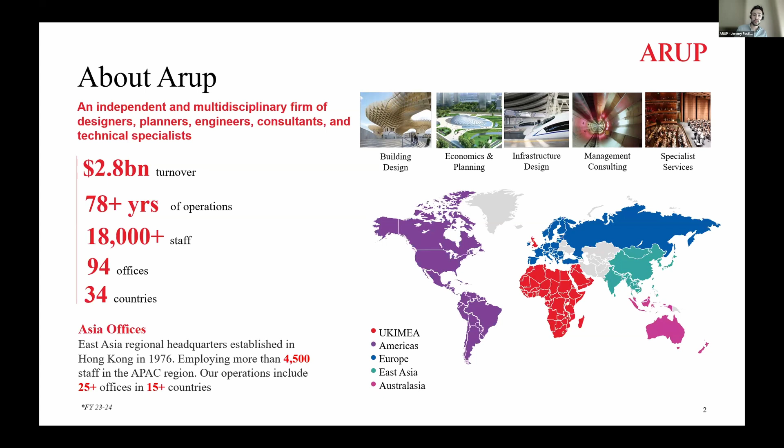Now, we have been involved in a lot of alternative fuel projects around the region, and we've been very active specifically across East Asia and Southeast Asia as well. So, for instance, in Singapore, we've been involved with techno-economic studies or supply chain studies for the Singapore and UK government. And we just recently completed a project for a private investor in Singapore that was looking at decarbonizing CCGT turbines with alternative fuels like green hydrogen, but also blue ammonia, green ammonia, and other combinations of green fuels.

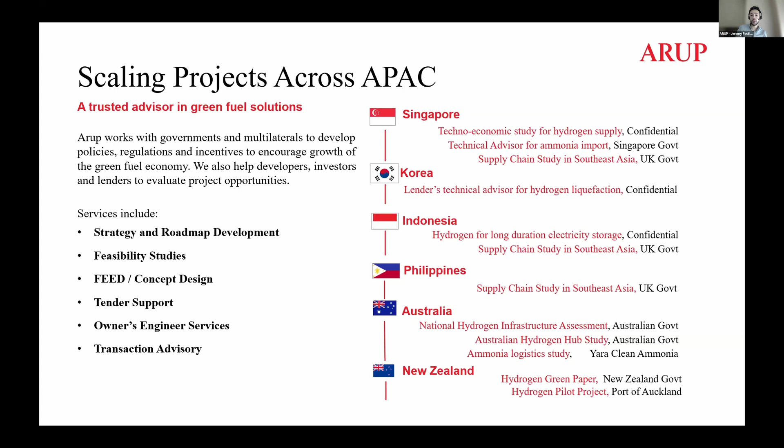But we also covered other parts of East Asia, such as Korea. We've also done Japan, which is not shown on this slide here. We've also covered countries like the Philippines and Australia as well, so beyond Asia as well. In Hong Kong, we've also been very active in hydrogen projects specifically. And this started really with the 2023 study that we did for the EMSD, in which they had started the feasibility of launching a hydrogen bus for Hong Kong. Now that is actually rolling in Kowloon, but we did the original drafting of the code of practice for EMSD.

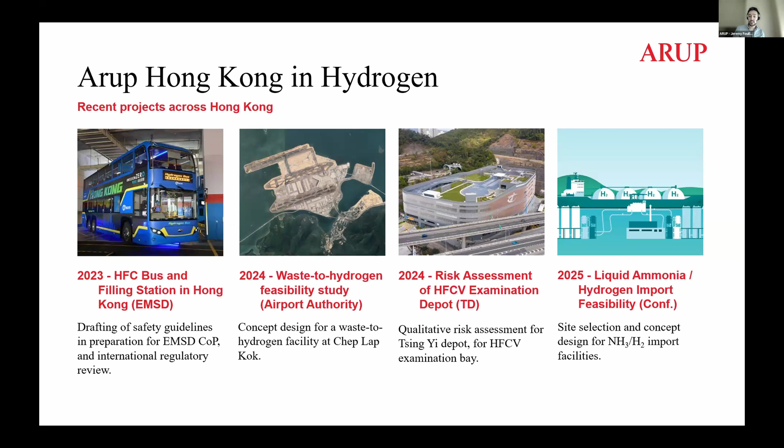We also continued this with studies for the airport authority who looked at waste to hydrogen at their facilities. So we did the early concept design for that project. We looked at doing a risk assessment for the transport department at their depot in Tsing Yi. And just a few months ago, one of my colleagues delivered a study for a private client looking at liquid ammonia and hydrogen and the possibility of importing that to Hong Kong.

Now, why look at hydrogen in the building sector for Hong Kong? Well, there's really three topics surrounding this. And the first is the geographical factors that we have around here in Hong Kong. So the main thing is that there is a large breadth of choice when it comes to hydrogen production projects in the Guangdong and GBA area. So large hydrogen production, but also transmission projects that could feed into the Hong Kong demand. Hong Kong also benefits from its status as a global trading hub, which, if resorting to overseas trading, can be very beneficial for the Hong Kong context.

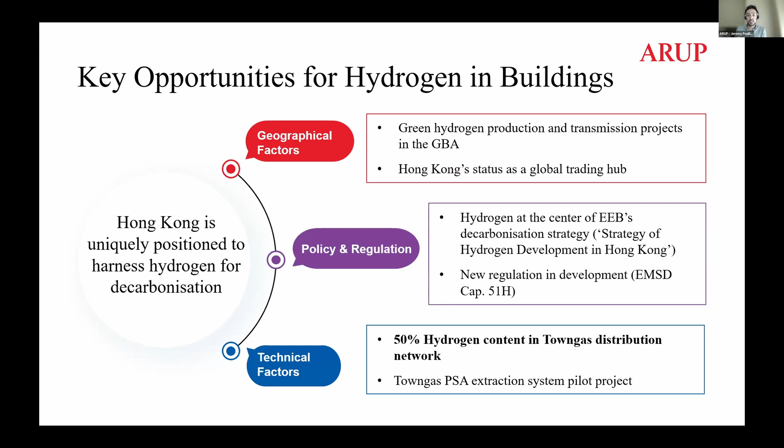And in terms of policy and regulation, the Hong Kong government has always pushed through with hydrogen as a means for decarbonization. And in fact, there's been very recently a consultation on an amendment to Cap 51, so the Gas Safety Ordinance, to incorporate hydrogen on the same level as town gas. But I think one of the most interesting factors about Hong Kong is the technical aspect, which is that the town gas distribution network already includes 50% hydrogen by volume, something that Dr. Kong from Town Gas already explained in the last series of webinars.

And some of the technical factors outside of Hong Kong that are allowing this are mainly related to developing a viable global supply chain. Now, some of these look a bit old. There was already the liquid hydrogen delivery project back in 2022 by Suiso, and then some more demonstration projects in the Netherlands, in Korea, in North Africa. But I think one of the more recent developments that is very interesting, and that's not shown in this slide, is actually the memorandum of understanding between Marubeni and Envision in China to export green ammonia from Inner Mongolia to Japan. And that shows kind of a drive to international supply chains of green and blue hydrogen and ammonia.

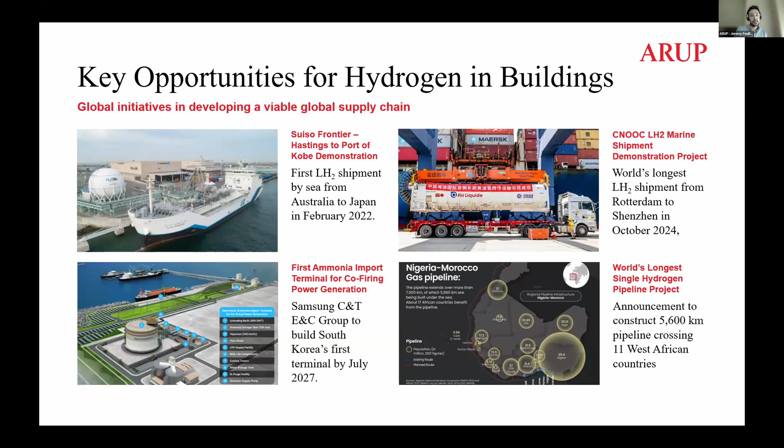Now, to introduce this study very quickly, we looked at this in 4 stages. We first developed a high-level concept design. So this was looking at how can we use hydrogen in a building, using perhaps the town gas supply as a direct supply of hydrogen. Then we did a brief regulatory review, drawing on our past experiences in consultancy studies here in Hong Kong. We looked at doing a decarbonization estimation, essentially a well-to-gate decarbonization estimation, and then looked at different stakeholders that we could discuss this with, eventually target as a consultancy, and carry this forward as a concept.

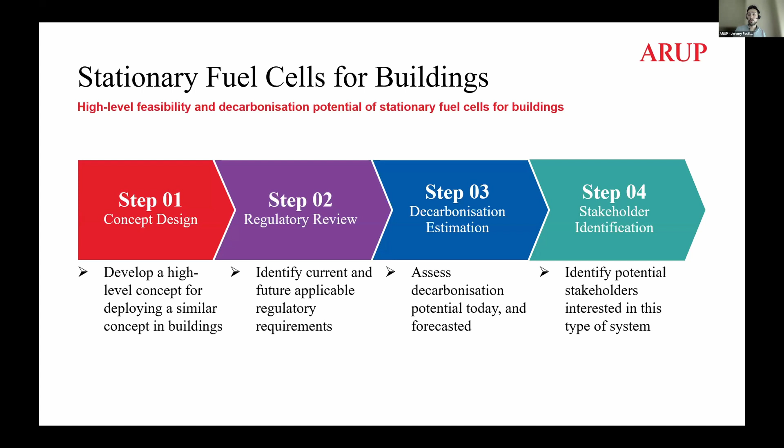Very quickly, because I'm sure Town Gas has covered this already, this is the original pilot project that was launched back in 2023. The pressure swing adsorption system that was used back then was a rotary type PSA. Very simply, it extracts the hydrogen from the town gas pipeline and re-injects any residual gas, which is separated from the hydrogen, back into the town gas network.

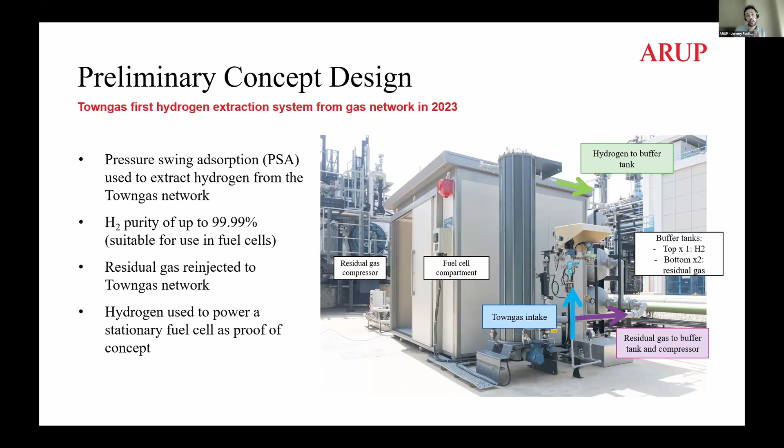To develop this concept design, we looked at a range of different commercial solutions, and there are many commercial solutions already on the market. There are some like the Refire systems, which can be very large, from 1 up to 3 megawatts in capacity. But at the building scale, we wanted to keep it relatively small. In consideration of the actual energy demand of typical buildings in Hong Kong, we wanted to limit this as much as possible. So we ended up settling on this system by EFOY here on the right, which is a 50 kilowatt system. There's no major reason for this, except that it fit the right range that we were looking for at the time.

It also has a built-in inverter system, which is very important because you don't want to have to install a separate inverter system, which would complicate the installation. So that's why we ended up picking that system, but you could just as well have picked a Toyota system, a smaller Refire unit, a Honda system, or a Ballard unit.

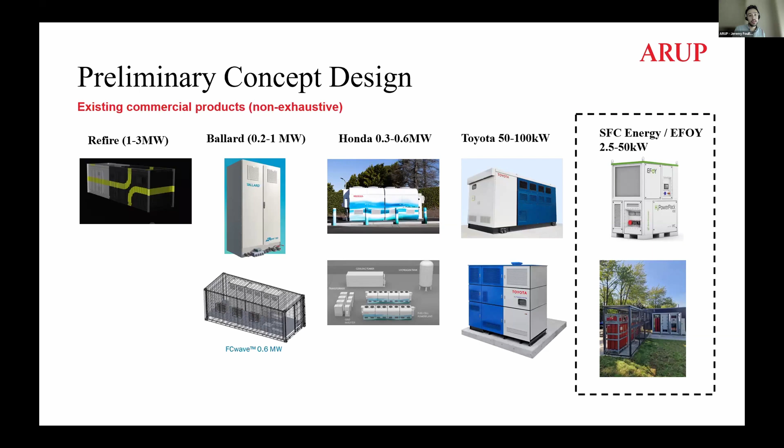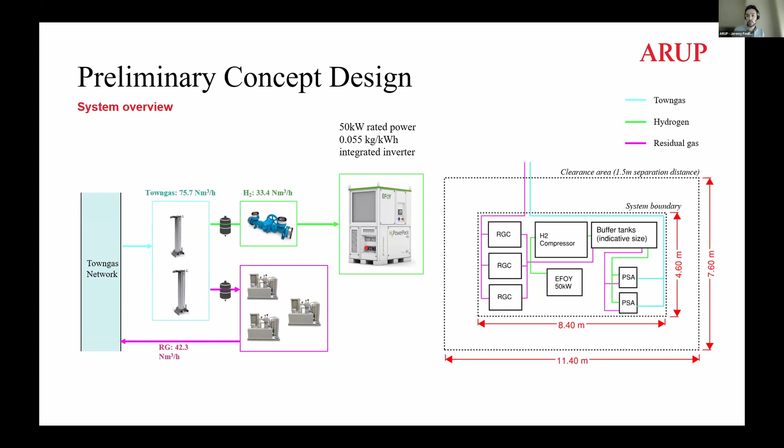Taking the concept of the town gas pilot a bit further and expanding it to meet the demand of a 50 kilowatt system, we essentially just expanded the town gas pilot and did a feasibility based on that. So we use the same exact components, 2 rotary PSAs in our case to meet the hydrogen demand of the system, and multiple compressors, first to compress the hydrogen, but also to compress the residual gas that gets re-injected to the town gas network. Based on this, and using NFPA as a guideline for sizing and separation distances, we get a system that is about 100 square meters in size for a 50 kilowatt rated power system.

We could have looked at other supply methods in this case. For instance, you could consider bottle supply, which is probably the first port of call for most of these cases. That makes a lot of sense if you're looking at a backup power supply type of system. But if we're looking at in-operation decarbonization over a long period of time, this becomes more difficult because it implies frequent deliveries of bottles to site, perhaps pallets of 15. There are other systems like tube trailers, which would reduce the frequency of these deliveries, but in a high density urban environment like Hong Kong, it would be quite difficult to deliver tube bottles to site on a regular basis.

We didn't even look at pipeline supply because there is already a pipeline supply in the form of the town gas distribution network. Forming a dedicated hydrogen pipeline network would just be too much of a capex investment for this type of solution.

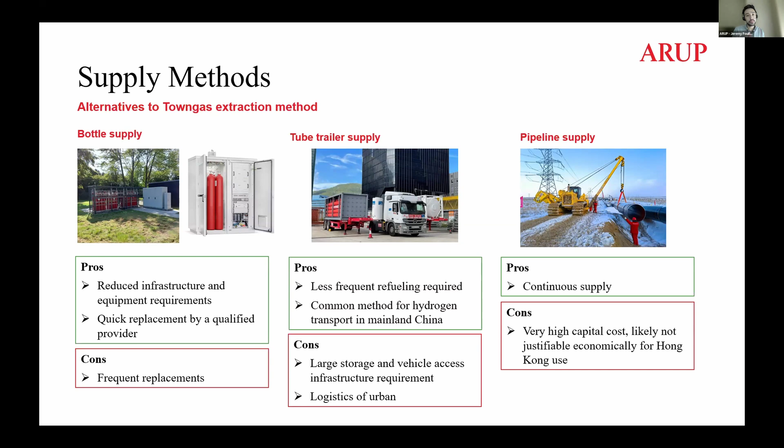So knowing this, we looked at what the regulatory background would be based on our past studies in this field. To put it very simply, hydrogen is currently a dangerous good under Cap 295. Most of you probably know this already. There has been a consultation on moving the scope of hydrogen from Cap 295 to Cap 51, so under EMSD. And there's an ongoing, well, actually a completed consultation for Cap 51, the Gas Safety Ordinance.

This has meant new codes of practice for hydrogen systems, new QRA requirements by EMSD, and new inspection requirements from competent persons. The interesting thing is there's no code of practice yet on fuel cell power generation, although this is currently in the works and may come out in the next few years. We expect it will likely reference NFPA, but also possibly GB standards. Internally at ARUP, we often use NFPA as our standard since we have a lot of projects in the US, and this is what we based our study on.

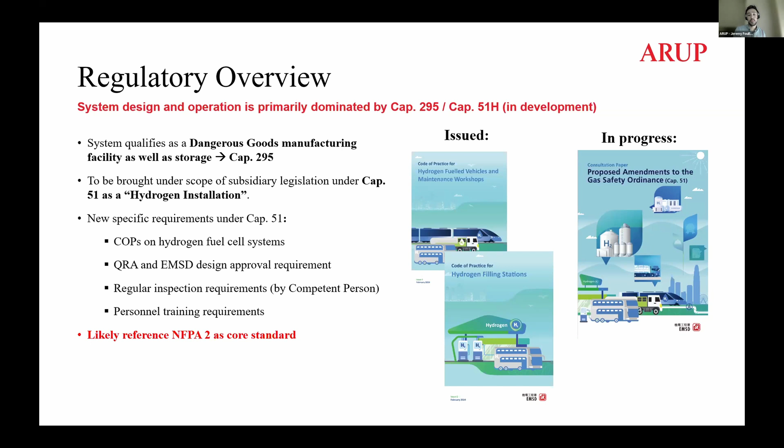To do a well-to-gate emissions estimation of the project gets quite complicated because you need to consider several factors, one being the carbon intensity of the town gas extracted from the town gas distribution network. You also need to consider the carbon intensity of the electricity used to power the pressure swing adsorber and the compressors, meaning your system is still somewhat dependent on the carbon emissions intensity of the power supply you're using.

On the right, you can see that a system using CLP electricity would have a similar carbon intensity to just using CLP electricity directly to power your building, on a kg CO2 per kWh basis. If you're connected to an HKE system, it's a bit different—at this point, actually using the PSA system is beneficial in reducing carbon emissions compared to directly using electricity from the HKE network. The reason is that the HKE network has a much higher carbon intensity compared to the CLP system.

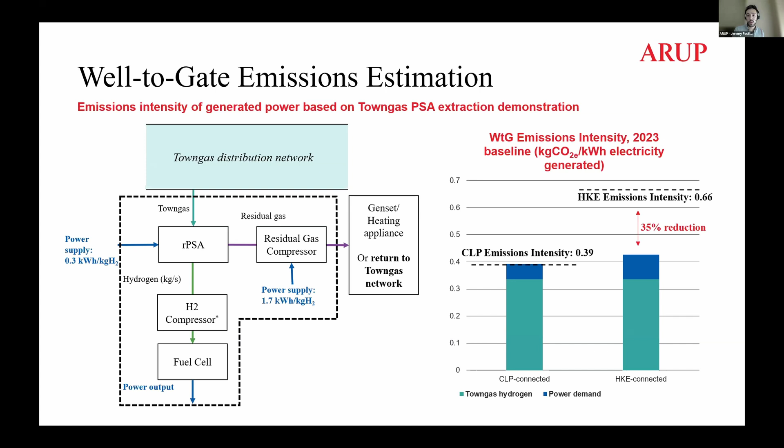This is all based on 2023 data, by the way, a quick disclaimer on that. This is obviously going to change quickly over time, and that's what I want to show in the next few slides. So to put all the sustainability targets of HKE and CLP on one page, we plotted this quick graph.

We interpolated linearly between the different targets of HKE and CLP sustainability reports, but with a caveat that in practice a linear decrease in carbon emissions per kWh isn't realistic. It would probably be stepwise, perhaps as HKE closes down further coal power plants or CLP imports more power from Daya Bay nuclear power station. But overall, by 2050 we're expecting a carbon intensity of essentially zero, as most companies are targeting net zero carbon emissions by 2050.

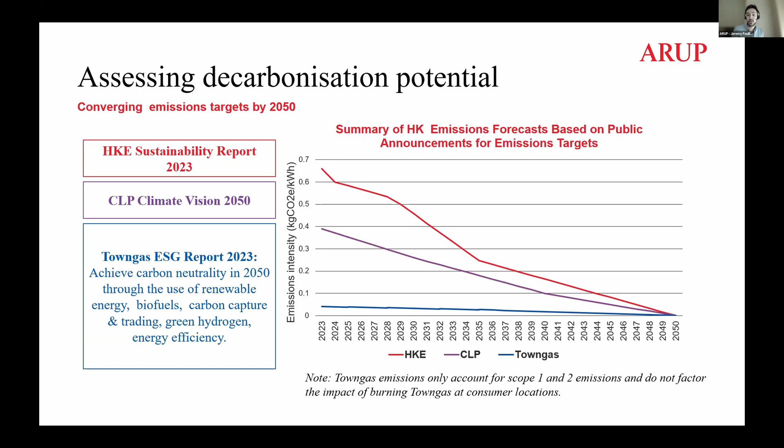Based on this, we can estimate the carbon emissions intensity of our PSA system over the coming years up to 2050. Looking at the HKE system, I mentioned that using 2023 benchmark data, the PSA would have lower carbon emissions intensity than using electricity directly from HKE. But the problem is that over time this advantage decreases, up to about 2035, where you're just as well off using electricity directly from the HKE system as power from your PSA system. So the benefit reduces up to 2035.

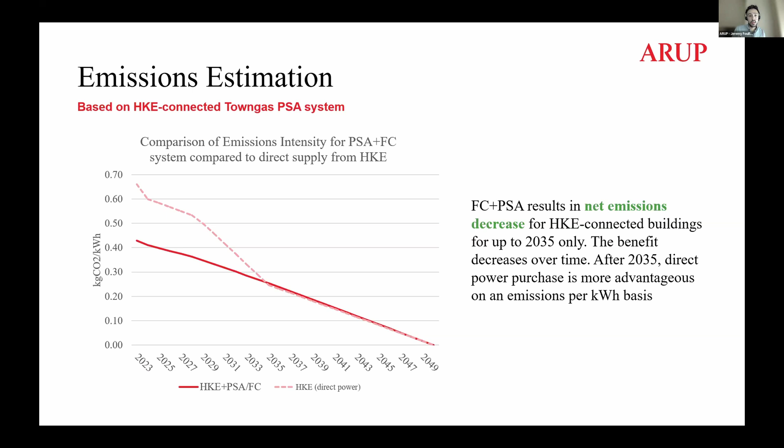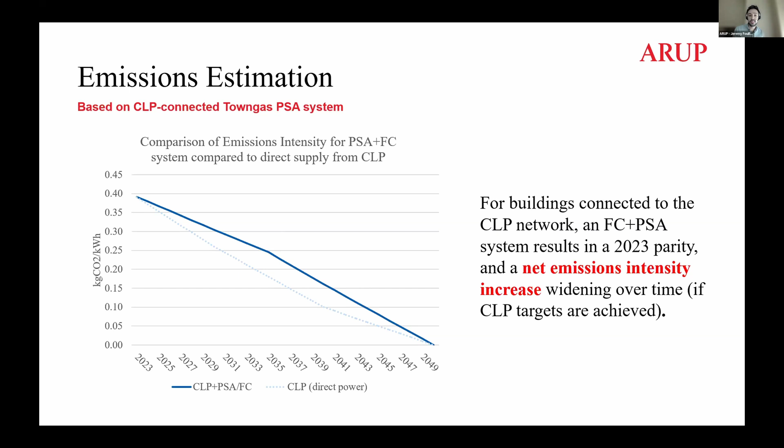Now I just want to caveat all this by saying we did not look at a hybrid system where you might use residual heat from the power from the fuel cell. There are commercial systems now coming on with this ability, which can increase your fuel cell energy efficiency quite drastically. But we're not reflecting this here because we were trying to keep things as simple as possible for the sake of this early feasibility study.

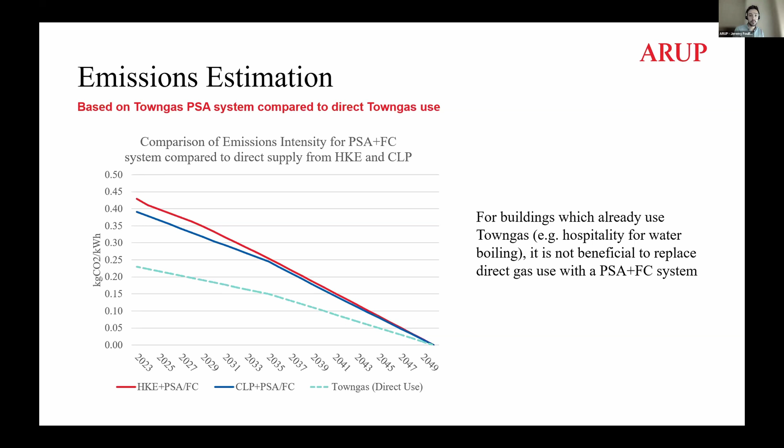Looking at what type of stakeholders you might want to approach for this kind of system, we focused on stakeholders with a combination of high space availability and low energy use, in terms of kilowatt hours per year per square meter of surface area, as well as simple forms of ownership. Can the owner of the building actually be the owner of the PSA system? Or do we need more complications, like can it be owned by the tenant, or do you need some sort of sharing agreement between the tenant and the owner? We're trying to avoid these kinds of complications when it comes to contractual agreements.

We're also looking at places where you can offer synergies with other applications. This is something Towngas has already been looking at, using hydrogen to power EV chargers, for example—a perfect synergy of a hydrogen extracting system with a transport network. Based on that, we find the most likely adopters of this kind of system would be warehouses and logistics centers, just because they have a very large surface area. So if you're a logistics operator like Goodman, you might be interested in developing this system either on your rooftop or at ground level.

There are other stakeholders that might be interested in this: HKIA, the airport, and large school campuses, such as HKUST or Hong Kong Science Park, for instance.

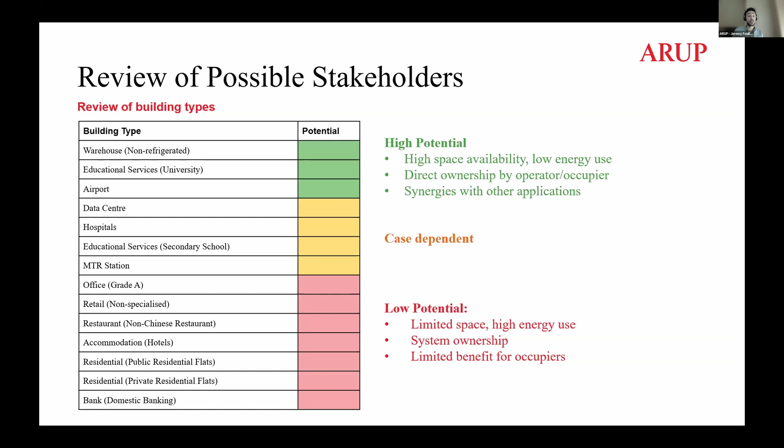I'm just outlining here the key building types we look at. These are firstly campuses—this is perfectly in line with what Towngas is doing with the Hong Kong Science Park. There are possible synergies with EV charging, for example, but also general decarbonization of building power supply. The airport offers a similar opportunity, and in fact the airport has already expressed interest in using hydrogen to decarbonize their system, and they've also explored using hydrogen for their ground fleet. So this could be another synergy for this PSA system for decarbonization.

Data centers are also an interesting case just because they have a very large and stable energy demand. But what we find is that the size of this PSA and fuel cell system would be so small compared to the actual demand of a data center that the impact would be minimal. Warehouses and depots are probably the most interesting stakeholders for direct power decarbonization, especially non-refrigerated warehouses, since they don't have high energy consumption in terms of kilowatt hours per square meter.

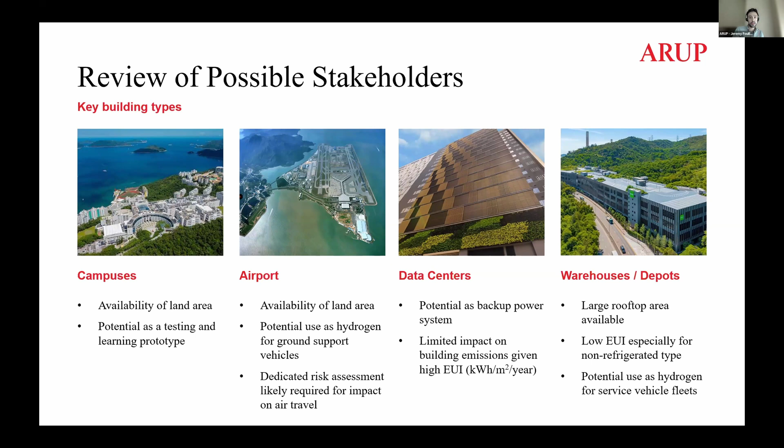The key takeaways I'd like everyone to come away from this presentation, which admittedly is very short and full of caveats, is that Hong Kong is in a very good place for exploring hydrogen and the hydrogen supply chain, and possibly harnessing this to decarbonize both the power sector, but also, for instance, the transport sector, the construction sector, or the industrial sector.

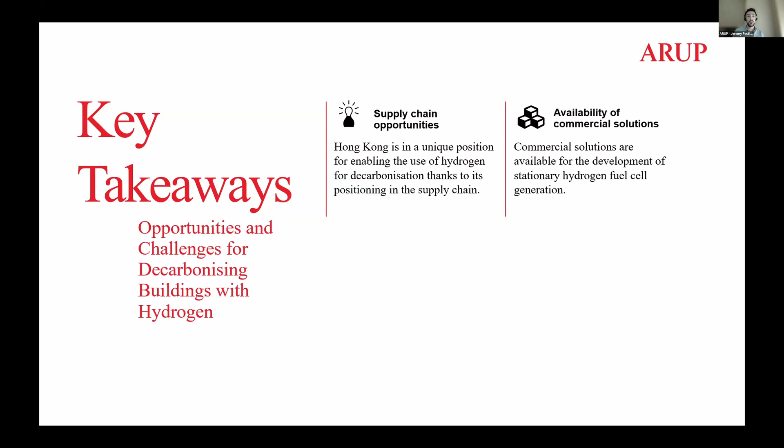There are commercial solutions out there. I'm sure there are many people on this call representing OEMs involved in this kind of system. These exist and can be used for Hong Kong building sector decarbonization.

From the comparison of the CLP and HKE connected systems, we find that the decarbonization effect could be minimal, especially in the case of a CLP connected system, if the CLP grid followed its sustainability targets. HKE systems are a bit more beneficial—there's more of a difference between power sourced from this PSA and fuel cell system as opposed to power directly sourced from the electricity network.

Lastly, we identify the key stakeholders that might be most interested in developing this type of system—typically warehouses, logistics centers, and possibly data centers. There's also the side benefit that they might act as a backup power supply, although the size of this fuel cell system might be quite small relative to the actual energy demand of a whole data center building. And lastly, campuses, where there can be synergies mainly with EV transport.

I think that's come under time by quite a bit—hopefully that brings you back on schedule. Let me know if you have any questions; happy to answer any questions on this or point you towards the right people within ARUP if needed.

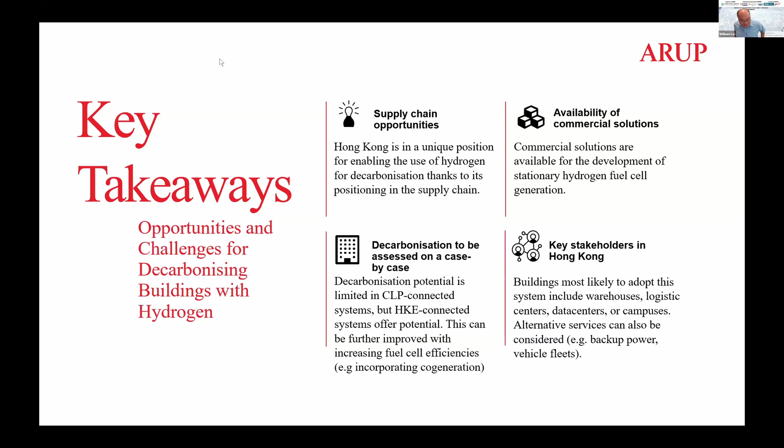Okay, thank you, Jeremy. Excellent presentation. Thank you. Thank you.